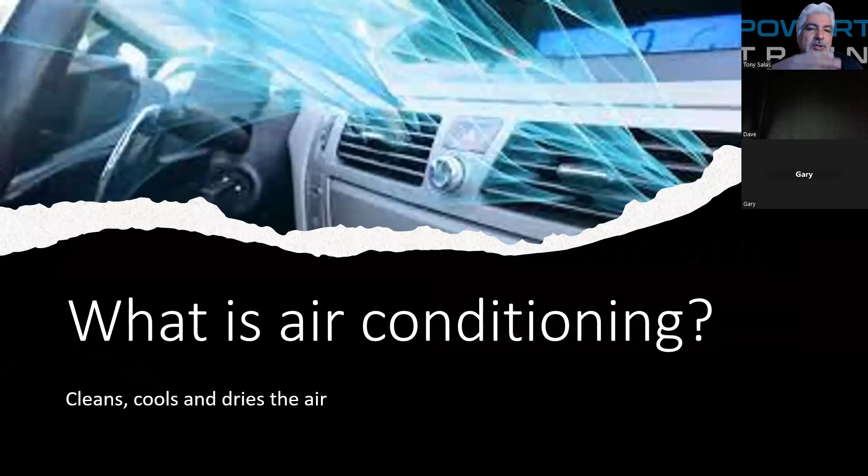We're going to be referring to this as I talk about other things regarding air conditioning. What I mean is, when we talk about the humidity factor, for example this week here in Las Vegas, we're going to hit probably by Saturday 115 to 118, but that is mostly a dry heat. But due to population growth, humidity levels are rising here, so the dry heat is not so dry. Then in August timeframe, we get the monsoon season.

So people will tend to say, hey, my AC, I have to set it cooler or colder, whether being at home, in an office building, or in a vehicle. The AC does tend to work harder when there's more humidity in the air. So your specifications, and I'll show you some examples later about what kind of temperatures you should see, especially in high humidity. So humidity does play a role, and that's why we say it dries the air.

So it does clean. Today's systems nowadays have cabin air filters, so that's a new thing. But in the past, we didn't have a cabin air filter on a lot of trucks. So the cabin air filter adds an insurance policy to protect against any contamination, dirt, or even smells that can come about with the evaporator, which we'll discuss later as well.

So when you talk about people complaining about AC, there's many issues. What are those issues? Well, the AC just doesn't work. That's the common complaint we get when trucks come in - not cooling, somewhat cooling, in other words lukewarm, as people like to say, or maybe it's just not blowing in the face. There's no air coming across into the face.

So your job, as we'll talk about the initial diagnostics of AC, is you want to go ahead and check to see if all the modes are working from defrost to face to floor. Are we seeing that we are getting airflow going in there, and making sure we have adequate airflow as well?

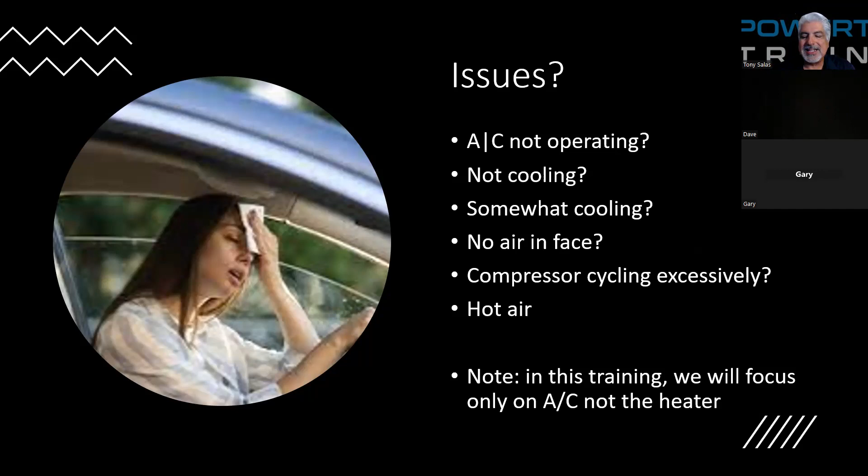So if you've been working with AC systems, let's say you're doing a cab-off repair, or you're just trying to fix the AC system, you've got to know your refrigeration system and how to do the job right. I'm going to start off with one thing as I talk about refrigeration systems and AC systems. And that is this.

If you look at, let's say, I buy a brand new truck - what is the life that I expect out of that AC system before it'll need to be opened up or serviced? Now, if there's mechanical problems with the engine, that's a different story. But what I'm trying to say is, when the vehicle comes new, what is the average life of an AC system? For example, my '06, I've never opened my '06 system on my F350.

So my AC system on my '06 F350 now has what - it's an '06, it's 2023 now, so that's 17 years. So we're talking about that's how long my AC system has worked or is working on my '06 F350, believe it or not.

So I guess what I'm trying to say is the life of an AC system is dependent, especially on pressures and proper maintenance if it's done correctly. So AC systems can live a long time if done correctly.

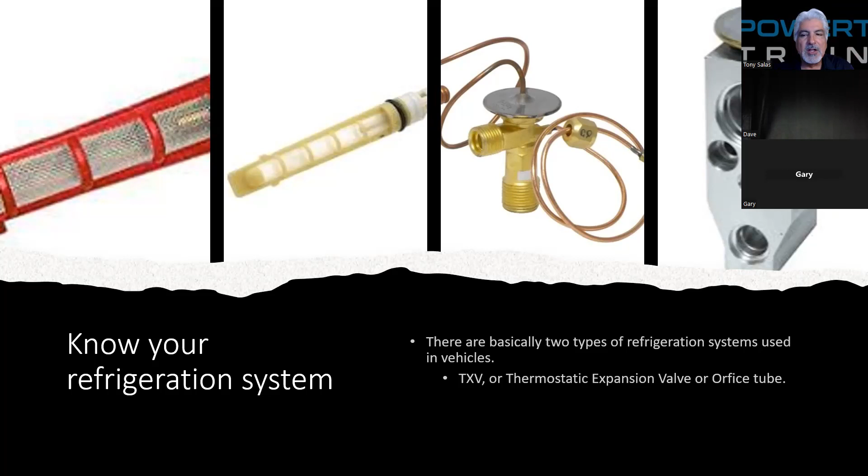So you've got to know it. What are the types of systems? There are two basic types of refrigeration systems. There are variances between them, I understand, but I had to generalize it. In this case, it's thermostatic expansion valve or orifice tube system. Those are the two basic types of refrigeration systems. With ongoing technology, we're going to see a few changes with controls and so on, but it still comes down mostly to thermostatic expansion valve or orifice tube.

Now, I also understand that we have different refrigerants. There's the 1234YF, which we'll discuss later, along with the 134A refrigeration system.

In order to understand how it all works, you've got to know the components. Most of you probably know them, but I'll mention them anyway: the compressor, which many people say is the heart of the system because it's the circulation tool that moves the refrigerant. There's the dryer — receiver dryers on thermostatic expansion valve systems — and the accumulator, used on orifice tube systems. Names may vary by manufacturer, but that's basically what we see. We also have a condenser, and the fan clutch or viscous fan clutch. On my Ford F-350, I have a viscous fan clutch which is PCM or ECM controlled. Then you've got the mechanical fan clutches, like some of the earlier Duramaxes that actually have a literal fan clutch, which we'll discuss here in a sec.

Airflow, right off the bat, is critical for proper AC. When I deal with RVers, for example, putting a motorcycle or bicycle on the front of the vehicle impedes airflow. I can't say enough about airflow, both on the condenser side and on the evaporator side. On the evaporator we have the blower fan as well, and the blower motor needs to be blowing adequate air. One of the tests we'll cover later, when we get into the electrical aspect of AC, is diagnosing the blower motor — we've seen cases in older trucks especially where the blower motor was turning the opposite direction, creating not enough airflow.

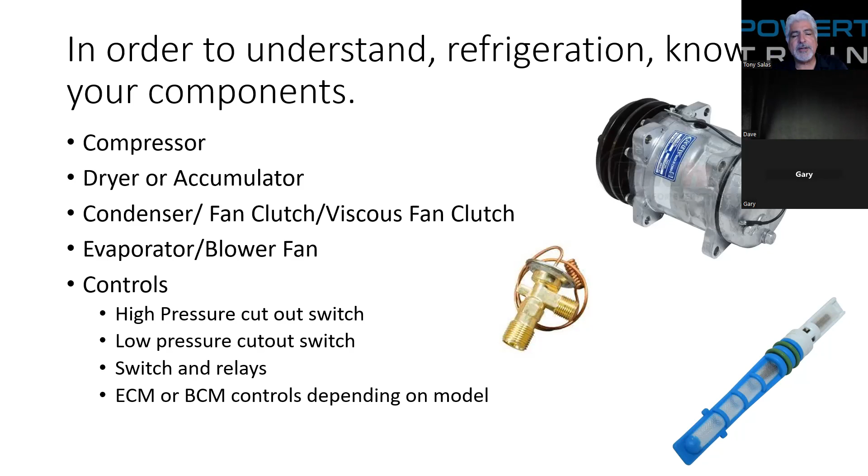So please note that there are controls for these systems. Now, the gauges are pretty much where everybody struggles. I don't know where you guys are at in terms of your level, but we'll ask that later as we move ahead. Your gauges are pretty much the main telltale of what's going on with the refrigeration system — but this is under the understanding that you have good adequate airflow going across the evaporator and good flow going across the condenser. So AC diagnosis relies heavily not only on feel, but also on using your gauges.

There are varied amounts of gauges used, but it comes down to your high pressure side and your low pressure side of what's going on with AC. So therefore, you can interpret a lot and understand a lot by looking at the pressures, but we're going to give you some charts that are available.

And I did a search when I was finishing up this side of the presentation, and I couldn't believe so much information out there that you now can readily have. I went through my boxes recently and found some old AC books, and a lot of it now is online.

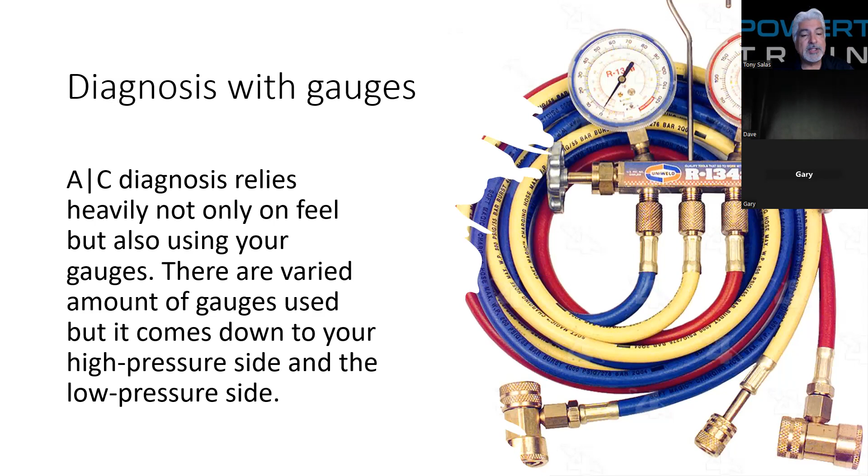Just a matter of doing a Google search, and you'd be surprised what you might find when it comes to pressure. So we need to break down the AC system into the two departments. What are those two departments? Well, there's a refrigeration side that I've been mentioning already, whether it being 134A or 1234YF.

Now, the system develops the cold. This is the cold that you need to cool, clean, and dry the air. So therefore, that's the refrigerating side.

And then we have the HVAC side, which HVAC stands for heating, ventilation, and air conditioning. That is the whole plastic housing that sits underneath the dash or behind the bulkhead of the truck, or whether being on a rear AC system too as well.

So the airflow that is diverted to your face, the seat position, whether being the seated face position, you're going to the floor, or you're going to the defrost mode. It all depends how it's all set up.

Because let's face it, we use air conditioning, believe it or not, in fairly cold environments because we're using the dry air to actually dry that windshield or that moisture that can be condensing onto the windshield or the windows of the truck. So the blower motor develops the airflow to go across the evaporator.

At that point it is diverted to a combination of different modes. Again, floor and face, defrost and face. It could all vary depending on what model truck you have. So your job is to verify all the modes are working.

As you diagnose an AC system, you'd be surprised at all the different AC problems that I get. Number one is, it's just not cold.

Okay, but is there airflow going across the face? Is there some of it leaking up to the defrost, some of it leaking down to the floor? In other words, you need to verify that it's all working.

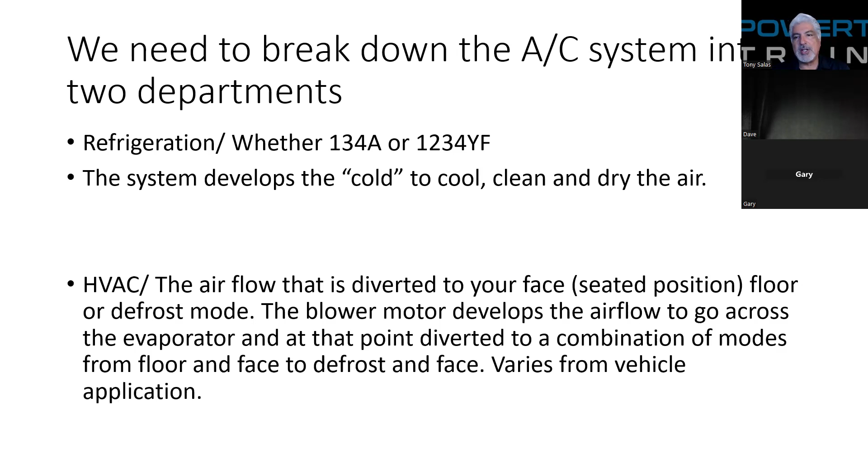Am I getting hot? Am I getting cold? In other words, that mode temperature door - that also needs to be checked because maybe it could be stuck too. So you got to verify that.

So the first step - I mean, we're going to be talking about different technical items, but the first step in diagnosing AC performance is to follow a procedure, what you're going to do. Obviously the easy one, like I said already, is it's not blowing cold. I know. But you need to check the whole operation of the AC system.

So visually, you want to set to face mode. They want you to do a temperature check too as well, but we're not going to get too hard there yet.

But in this case, your job is to turn the AC on. Let's go ahead and put the blower on high. Let's make sure we got adequate airflow. Again, no leaks to the defrost, no leaks to the bottom, but you may want to cycle through the different modes.

Now, let's say the air is lukewarm. Okay, you probably got a refrigeration problem, but you still need to verify that you do have adequate airflow and you're not leaking in other modes. So therefore, am I looking at a refrigeration problem, an HVAC problem, or both?

So the customer might have been living with it leaking to the defrost mode a lot along with the face as well. They were just not aware of it or didn't care. That could have been the issue too as well.

So there are other vehicle models that have more than one fan in the engine compartment. Your job also is to verify adequate airflow. So as you open the hood and check your AC, if it's got electric fans, you need to make sure those are chucking air or moving air.

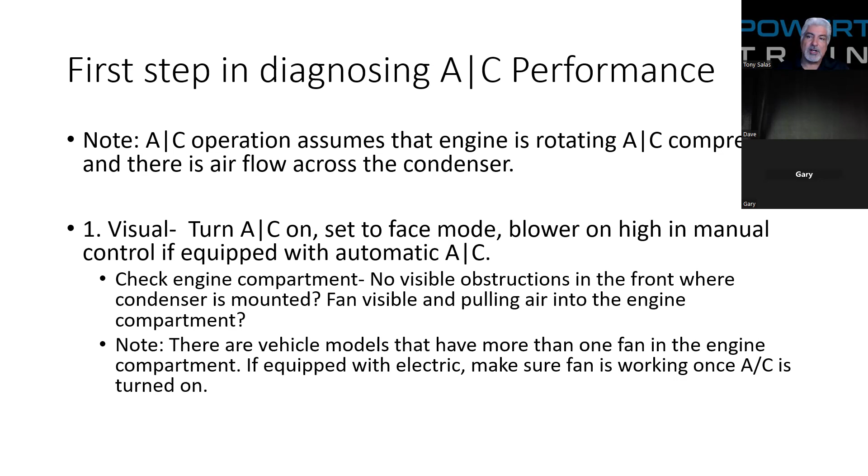Cabin air filters, very important to do. I have a Toyota Tundra, and before I left on vacation last week, I decided to check the cabin air filter. I was amazed at how much, even though I felt I had good airflow, just by removing the old cabin air filter and putting a new one on, the airflow increased even more. We were freezing in that truck, and it's a black truck. Yeah, I know, stupid me buying a black truck, but there you go.

So let's first talk about the fan clutch style. Now, I get a lot of issues. The Ram trucks for the longest time have had problems, the 5.9s, early 6.7s, those diesels. We have had nothing but problems in the past and continue to, actually. I should say we still see them from time to time. We see problems with the fan clutch itself.

So here's my question: how do you test a mechanical fan clutch, as you can see here, or a viscous fan clutch? How do you test it? Many people will go ahead and put something like a blanket or fender covers in front of the grill, and they try to restrict the airflow. That bimetal spring in that clutch assembly will actually control a hydraulic coupler, if you will, and at that point, what it does is release or engage.

So as it gets hot, the bimetal should open, the valve should move, the hydraulics inside it, or the fluid, moves, locks it up, and you should hear the roar, right? That's very common to do.

If you have scan tool control and it's an electronically viscous fan clutch, then you can command the fan clutch, like on any Ford Power Stroke from 6.0, 6.4, and 6.7. But here's the question: with a Power Stroke, you have the ability to watch the fan speed on the scan tool. You go ahead and select fan SS, which is the fan speed. You can control it with the bidirectional controls, see the fan speed change, and audibly hear the fan roar.

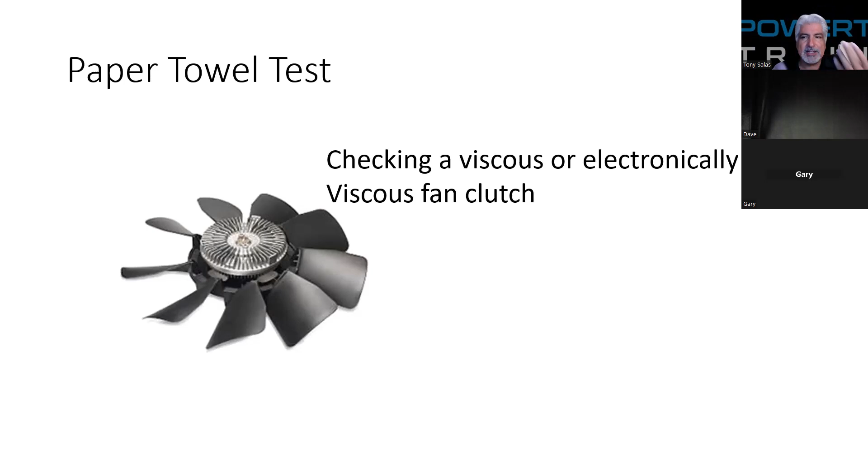I see this in both the aftermarket and even OE parts. You're thinking OE is the better one - that's what I thought too. No, it's not actually. That actually contributes to the life of the compressor, because again, adequate airflow across the condenser reduces the high side pressures, and that helps the compressor live longer. So airflow going across is very critical.

Now, I already talked about the cabin air filter, and about checking the modes of the blower to make sure it's blowing. If you look at an older model, let me talk older first, then later, because they have different setups. For example, the blower motor could have a blower motor resistor, a blower motor module, or a body control module controlling it - actually all 3 exist.

So one of the things you can do, which I'll talk about in session 2 of this AC series, is putting an amp clamp on the power wire going to the blower motor if you have access to it. A lot of them you do have access to, some don't, but you can do that. You're going to measure the amperage draw of that blower motor to see if it's not pulling too much, in other words, looking at its last days.

Or it actually is turning in reverse - that has been known to happen. And by the way, for those who've never seen this, if the blower cage is turning in reverse order, it'll still blow some air, but not adequate airflow. So it's not good. Doing an amp test is going to tell you a whole heck of a lot, not to mention it'll tell you if there's restrictions on the suction side of the blower motor too.

We'll talk more about that later as I get into it. So therefore, verify all the motors.

Now, number 5 says it's common to see vacuum control mode. Some of you know this already, some don't, depending on your experience. We all know there are many trucks out there, especially the early years, using vacuum controlled motors. And if you lose vacuum, the default for most models has been that it shoots air to the defrost mode, in other words, up to the dash.

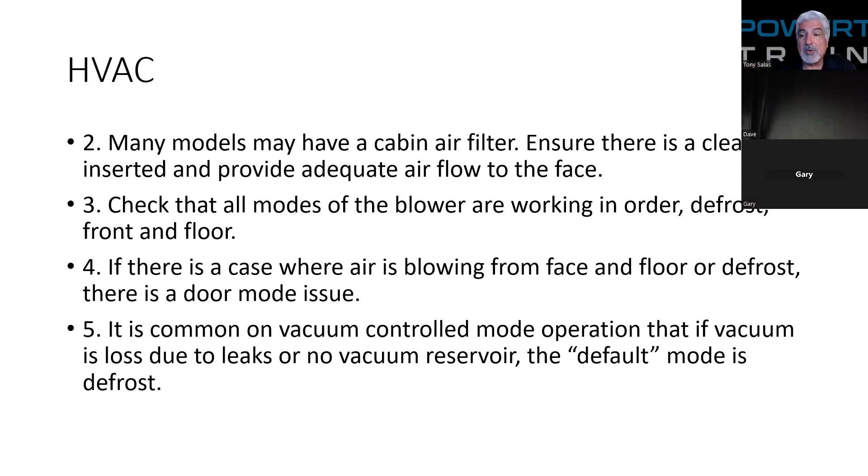In this case, you can actually verify that. There are trucks equipped with vacuum pumps, and gasoline trucks will also use vacuum from the engine itself on gasoline applications. Please note, every time a truck comes in always shooting to defrost mode and it's got vacuum control actuators, it's definitely most likely a cause of loss of vacuum. But we need to make sure we've got no vacuum leaks.

Now, as we look at various different applications, they're all going to vary. When you look at an old Silverado pickup, a Ford pickup, a Ram pickup, you're going to see different modes of operation. So let me go ahead and select the highlighter here.

As we look at the highlighter, we're going to see different things, but we'll see our main components right here. Let me move this over. What do we got right here? Well, we got an evaporator core. So there's our evaporator core.

There's our blower motor. Obviously the outside air comes in, goes across the blower motor, then across the evaporator. So if you really look at airflow right here, you're going to see that the blower motor blows air across the evaporator, and then there's your blend door right there.

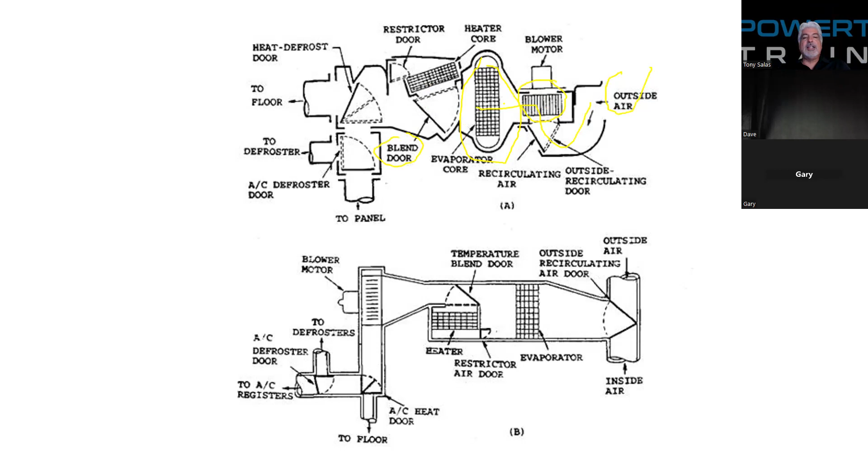So when I look at my blend door right there, that one's going to control my temperature, and you're going to see your heater core as well. So you're going to notice that all airflow coming in on this model actually goes across the evaporator, whether the AC is turned on or not.

That's why we see non-cabin air filter equipped trucks will actually get a lot of trash, a lot of crap in there, because it's just bringing in whatever's outside. If there's a lot of dust and leaves, it isn't surprising that the evaporator actually will get a lot of junk on it, which eventually will need replacement.

There are cleaners you can try to use, but haven't had too much success, only for odor control, because mildew in high humidity areas can actually accumulate around there.

But then, like I said, we got our heater core right there. So there's the heater core where we actually have the coolant being circulated through, and that could heat up that incoming air.

So can you have heater on and air conditioning refrigeration going through the heater core? Yes, because that will dry the air going towards the heater. That's when we see fairly cold, not cold-cold, but semi-cold, where the compressor will still kick on, and at that point that will dry the air, which we can send up to the defrost mode, which we see up here too.

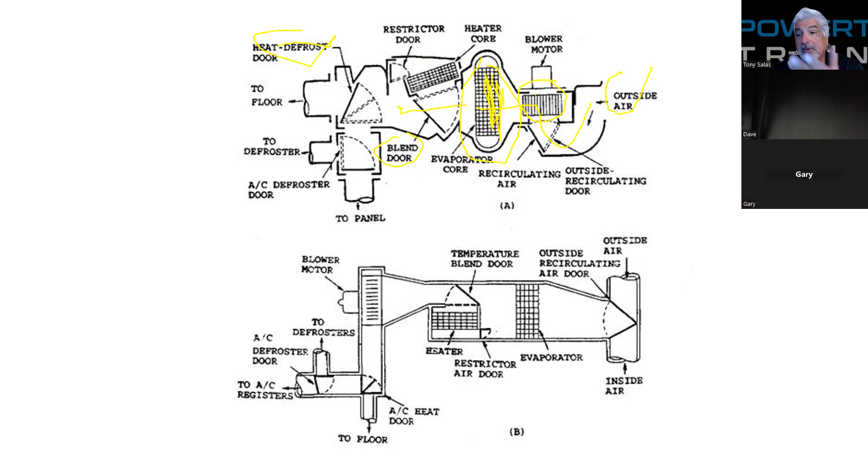So what I'm trying to say is it's a good idea on those trucks not equipped with a cabin air filter to always stick a camera in. Some guys, if accessible, find it easy to remove the blower motor from the bottom of the dash, or maybe from the side of the front, depending how it's all set up. This allows me to put a camera in there.

If I can't see, I can do a camera view of what that inlet of the evaporator might be looking like. I definitely want to verify that, because just because you don't have adequate airflow doesn't mean it's a bad blower motor either. It could also be that the evaporator is just extremely trashed up, very contaminated.

It's kind of sad, because on an '06 truck I did, I told the customer, listen, I took pictures of it with my borescope and showed the customer, it's just so much crap on there. And the truck only had 80,000 miles. Literally we had to charge all the labor to pull the whole dash out just to get to that evaporator. That was not fun. He didn't like it, but hey, that's what he needed to get his air conditioning back up.

So definitely those of you that live in high humidity conditions, like I said, mildew and growth can grow there. And there's different cleaners they sell you can spray in there.

You might have to drill a hole that you can eventually silicone into the housing. What you're going to do is clean that up, and pretty much you're trying to get rid of odor and any bacterial growth that can make people sick. Some people might say, when I turn my AC on I start sneezing or get sick - it could be that the evaporator is just really contaminated and has growth in there. So be aware of that.

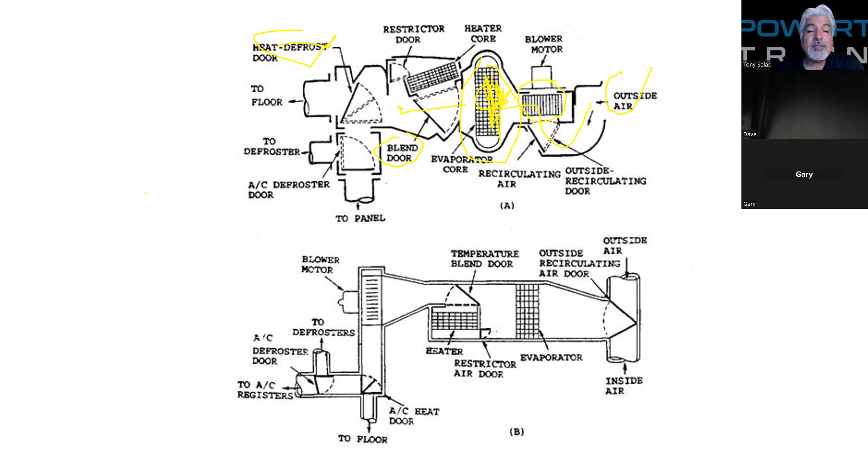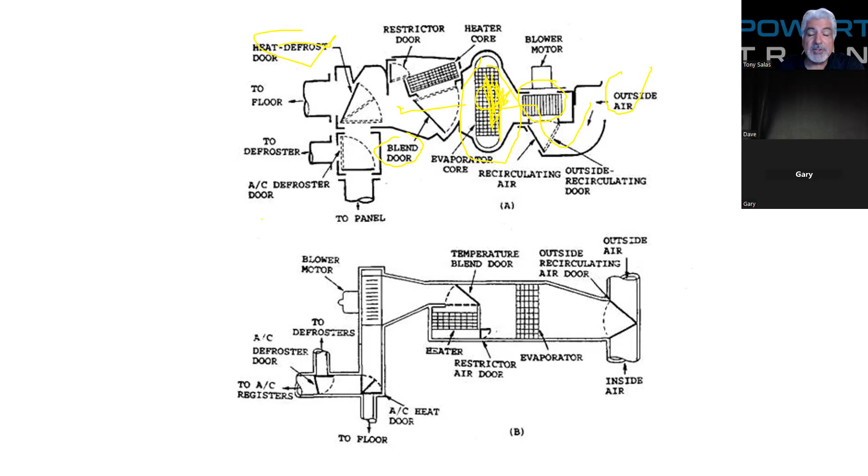On this bottom assembly, you can see the blower motor right here. So there's your blower motor, and there's your temperature blend door. There's your heater, and then there's your evaporator, and that's your outside recirculating air door. How's this all working? The blower motor is located here, with outside air and inside air on the bottom. It can vary in design as you can see here, so it all depends on design. Just understand the location of the blower motor and the location of different components.

Now, I don't know if you guys take time to look in the service manual - there's a lot of explanation on how the airflow works on different service applications, which I'll discuss in part 3, going over service information too, what's available for you.

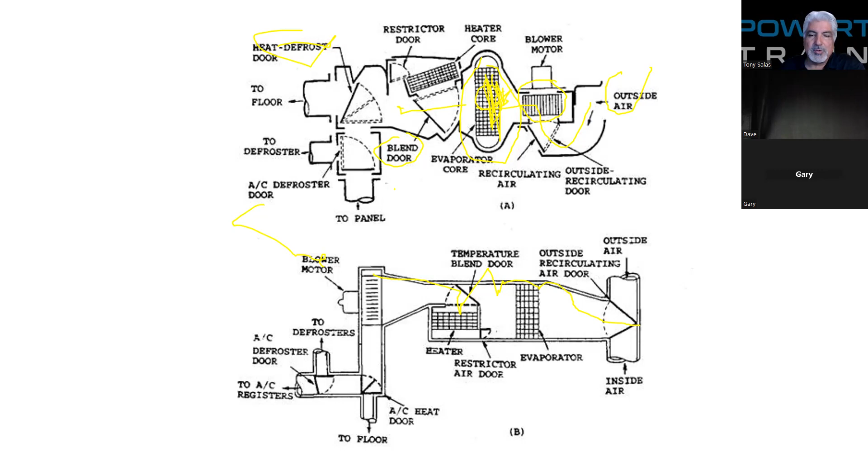So now, when you're checking your AC, it's important to make sure the truck has a heater control valve - for example, on 6 liters. Here's a good example, the one everybody can see there on the passenger side, sitting on top. It is a vacuum controlled heater control valve. I took a picture of one - in this case, yeah, it is vacuum controlled.

In this case we can see the diaphragm right there, that's going to move and put it over here - that's the vacuum control diaphragm. The vacuum control is going to move this lever and control the flow of coolant going toward the heater core. Why do we cut off the coolant going to the heater core? Because we don't want that intensity of heat sitting in that HVAC housing, so we just shut off coolant flow to it, so the HVAC housing can stay cooler with the evaporator and the refrigerant going through it.

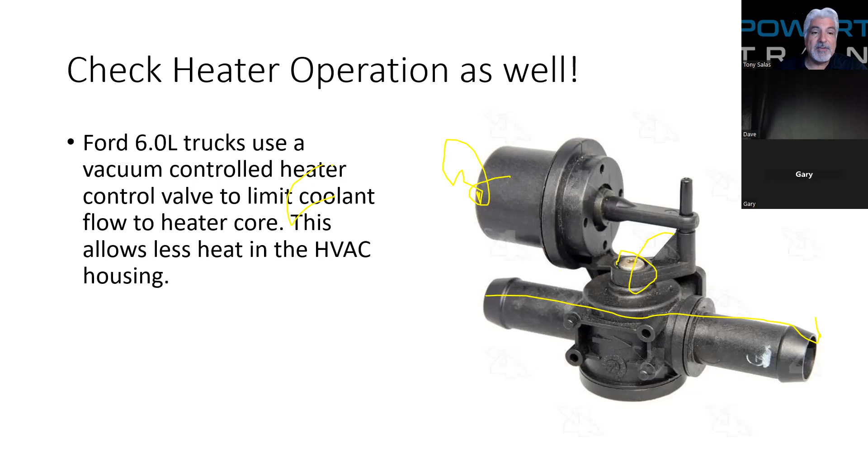That's something we need to verify too. Now, many trucks, you won't see much of a difference in refrigeration control - in other words, the coldness of it - but it affects it to a certain degree. So you want to make sure that you verify that it's in the closed position, and also verify its operation. You could put a vacuum pump on it to make sure it's not binding, and obviously they can leak coolant too, but just verify that it is closed during AC operation. That's something you always want to look at. I got to tell you, with 6 liters, I can't tell you how many of the hoses are just falling off, sitting there falling off, and it's never been working right. So you want to verify that the heater control valve is indeed closed - that's what you're looking for.

But when you look at refrigerant itself, pressure is pretty much, I'd like to say, everything. So the first thing in order of business is the challenge: is the system contaminated? When I go to my local auto parts store, or look on Amazon, you see all the stuff being sold - people have been topping off their refrigeration systems till finally it doesn't work, every year having to put a pound in it or this and that. The problem is some of those refrigerant cans they buy can have oil in it, or some other stuff or dye in it. So dye, oils, or other refrigerants have been used, which can contaminate the system.

Now, when I visit our outfit here in Las Vegas called Auto Air and More, they repair a lot of AC machines - recovery stations and such. I asked them a while back, a few years ago, what do you guys find that you're fixing on AC machines or station recovery stations that you do?

A lot of it is contamination. They get a lot of contaminated machines, meaning excessive dye, excessive other refrigerants, other stuff that's in it. So that's a big problem when we're dealing with some trucks, especially since I'm in Las Vegas. We get a lot of out of state trucks - what do they put in it?

So it's a good idea to get an identifier. A lot of guys don't use it. My identifier, I got to get a new one, it's no longer working. I tried to use it the other day and it doesn't work too well. So that's another thing.

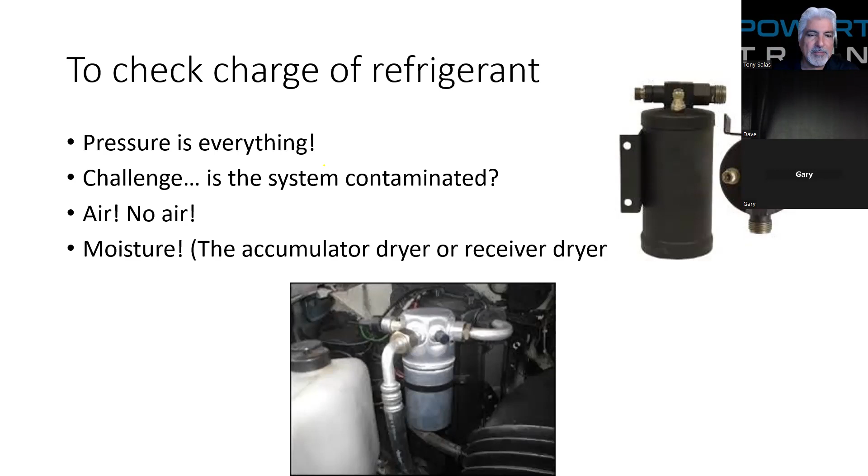So you're not sure, you don't know what's going on, but again you need to make sure you have the refrigerant you're supposed to have. Now the price of 134A - I called yesterday the local auto parts here, and the latest price I got was $279 for a 30-pound container.

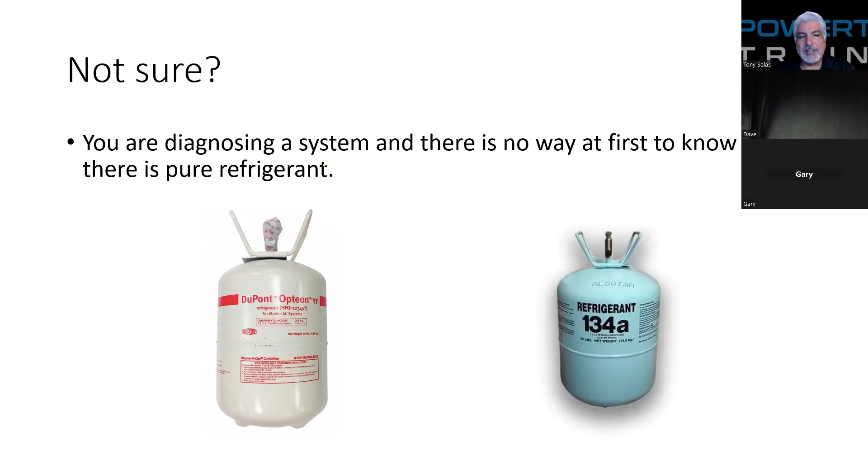And 1234YF, oh my God, that is mega money for that kind of container. I believe it's $900, I forgot - I gotta look, I didn't ask him about that one, but when I called a while back it's very expensive. So 1234YF is significantly more expensive than 134A. So I understand that, but again, you have to have some kind of identifier.

And why do you do it also? It's to protect the refrigerant that's already in your recovery machine. You don't want to contaminate your recovery machine. Because imagine if you have the wrong refrigerant in there mixed with 134A - are you going to get optimum temperatures once you charge the system up? Nope. So you definitely want to look at getting an identifier.

I myself, like I said, I got to get a new identifier too. So something to keep in mind, because you definitely want to make sure you have the 134, or 1234YF, and no other contaminant - the charged refrigerant, the status of the AC system you're working on.

So the thing is, you're approaching this vehicle. You just did an initial diagnostic, like we said in the previous slide. You verified the airflows - face, defrost, floor. You check to see there's good airflow across the evaporator. You tested the blower motor.

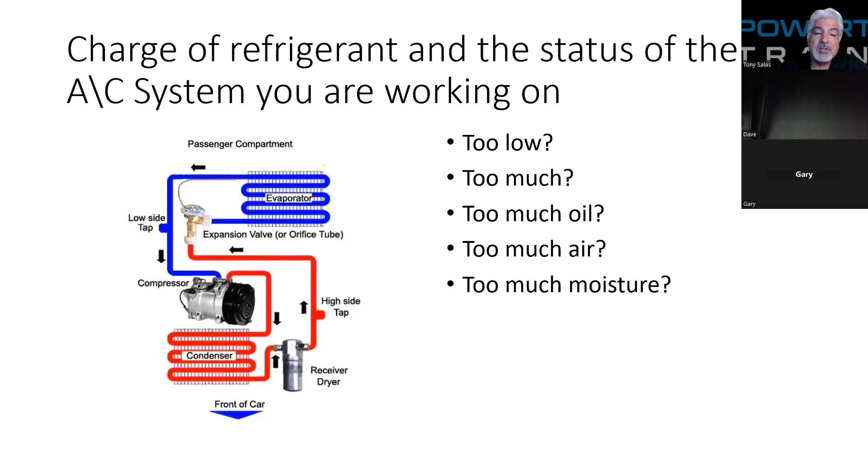So I don't know if the system's charged. So when I do an AC service or diagnosis, I charge for the recovery and the charging because I need to know where we're at. There's no way of me knowing what's going on the outside, so it could be overcharged or undercharged. So your AC recovery machine is going to be your best friend, but we'll talk later on more about the recovery machine.

But in this case, I hope you have maintained it. You change that oil, especially on that vacuum pump. You've changed your filters inside of it. That's all needed for proper operation of the machine. So there is maintenance that needs to be done with the machine.

But in this case, we need to recover. When you're looking at a system and you need to know what's going on, maybe it's the pressure all over the place. We got to understand that we don't know, again, that there is too much oil, too much air, or too much refrigerant, or too low, right? So therefore, the best idea is to actually recover.

Now, a lot of your recovery machines have the ability to extract the oil. They separate the oil. So in this case, we have PAG oils out there. We got minerals, we got ester oils, and so on. So in this case, what I'm trying to say is we got to make sure we have an understanding of how much oil there is.

So therefore, that's telling me that most likely I got a lot of oil in the system. So since I recovered, my next course of action, if it's an orifice tube system, for example, I will take the accumulator off and drain it to see if it's got excess oil too as well. So if I pull 4 ounces from the recovery and another 3 ounces from the accumulator, that system is vastly overcharged.

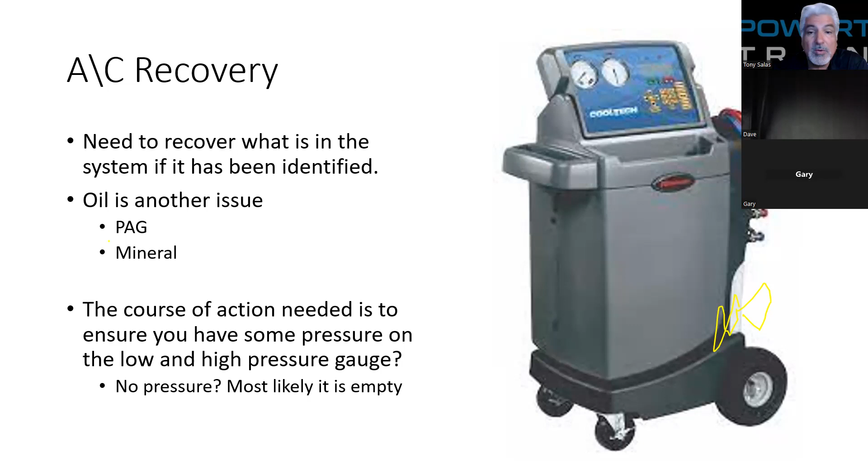But guess what? I'm going to do a recovery even if it takes a few minutes. We're going to see what comes out of there, if anything. But it might be low. So if you see 10 psi on both the high side and low side, yeah, you're running low. So therefore, you still recover, you still want to see, and then at that point you can decide what's going on, whether being you got too much oil, too little oil.

But I'll try to make sense of it as we move along. So like I'm saying, take a quick look at your gauge readings, the low and high pressure side.

Yes, there is a low and high pressure side in an AC system. I haven't introduced that, but there is a low side, which we tend to show in blue, and a high pressure side, which we tend to use red color to show. So let's mention the peaks. For the peaks on an operating system, if it's kicking on, if it's working, I generally don't want to see no more than 50 psi, and again, no less than 15 psi. And then on the high pressure side, you got to make sure the compressor is engaged, obviously.

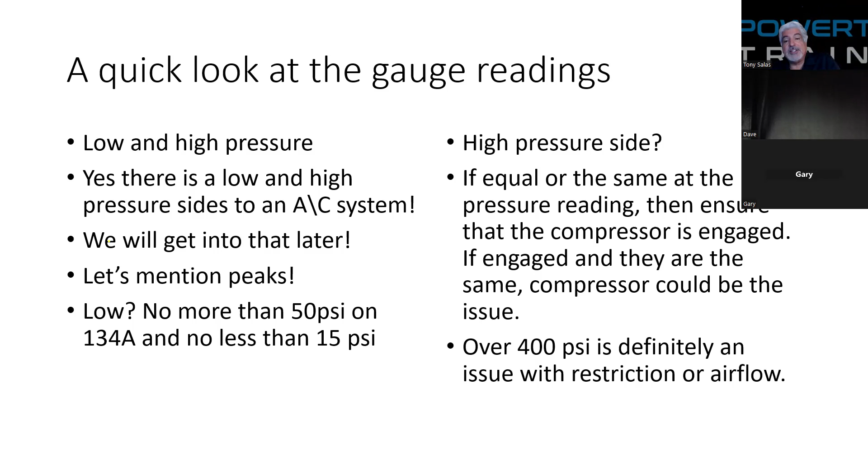And in this case, the magic number that should scare you is 400 psi. If immediately I turn the AC on and I see that high side gauge jump to 400, if not more, then that's a red flag right off the bat. Whoa, we got too much pressure.

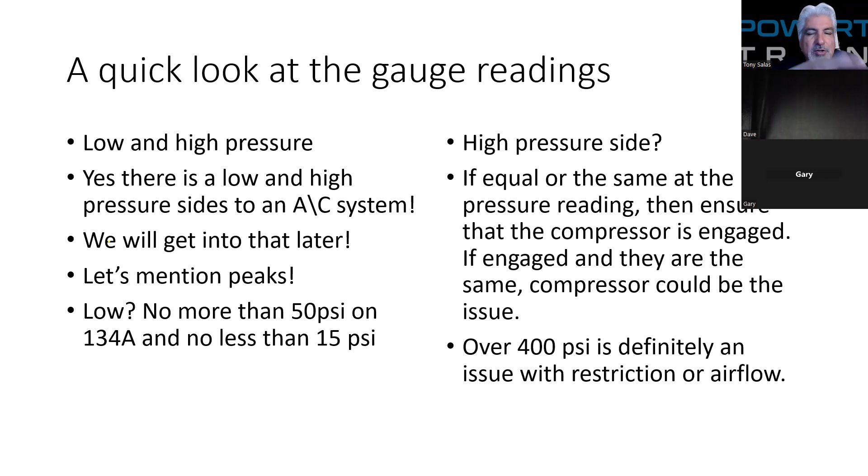As we introduce AC, obviously we got to go in more details. I'm just throwing you some basics here. If you hit 400, that is a big red flag right off the bat. That is a scary situation for the AC system. So high side no more than 400, while the low side you don't want to go over 50, and no less than 15 psi. Under 15, depending on the calibration of the low pressure switches, it could cut out the compressor at around 20 or cut it out at 15, depending on the make and model we're talking about. So I know you're looking at those readings and you want to try to make sense of it. Hold on, we'll continue talking about it as we move on ahead.

So the AC recovery process, this is under the assumption the machine is working good. You're gonna go ahead and pull the refrigerant, anything that's in the system, it's gonna pull it out. That's why we use the identifier, we pull everything out, and it'll actually separate the oil to tell you roughly what the oil content was in that recovered refrigerant. So again, we're gonna look at some numbers, and 2 ounces is probably the max, but we'll talk more in detail about it. We should not see that much oil coming out with the refrigerant.

But here's the other thing. If you pull refrigerant out of the recovery machine and you pull out so many ounces, you should put some of that oil back in if it's a normal system. So as much as we take out, we also need to put back in if necessary. A lot of guys recover when they're doing repairs and they're taking out oil, because the oil itself, like for example, let me backtrack to R12. I know this isn't an R12 class, but with R12, the old dichlorodifluoromethane stuff, the mineral oil went into solution. So as the refrigerant was circulating through the system, it was carrying the mineral oil with it.

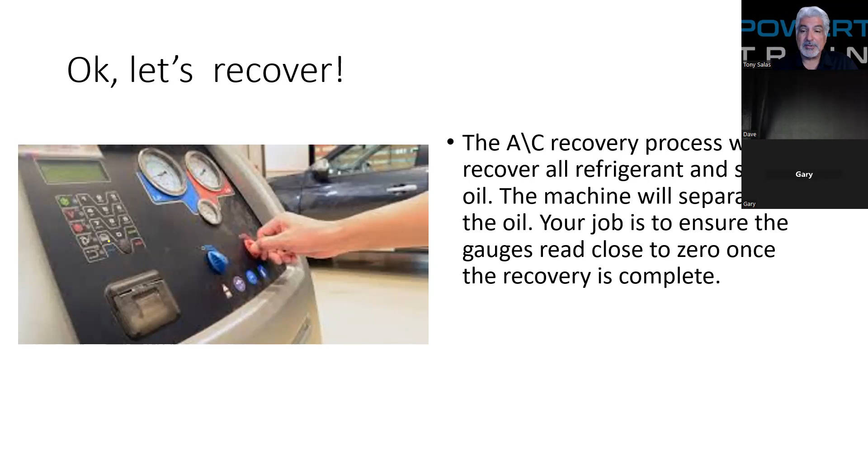However, with 134A, with PAG oil, it is snotty, it's just sitting down there. Back in the old days, in our community college days, we used to have a plastic see-through accumulator, and you could see the refrigerant and the PAG oil actually circulating, and this PAG oil was just snotty. So it's kind of like snot moving throughout the whole lines, through the whole system. That's the unfortunate part of PAG oil, same with ester oil too as well. So oil is constantly in motion, moving with refrigerant. If you want oil to move, you got to have the refrigerant moving with it, so that's what's moving the oil. That's why when you pull refrigerant out, it isn't surprising that it has oil with it, and that's what the machine is separating. So that is part of the recovery process.

So you might have a lot of dye in the system, or you're going to see that it has oil in it. So as they add a can, they're adding oil, oil, oil, over oiling the system, which in turn will affect the performance of the AC. It will not work properly.

Please make note that most systems vary in oil, but 7 to 9 ounces on a single non-rear AC system is about the average we see. So that's what you got to keep in mind. We're at the mercy of what they've done in the past with that AC system, whether they added too much oil or too much dye.

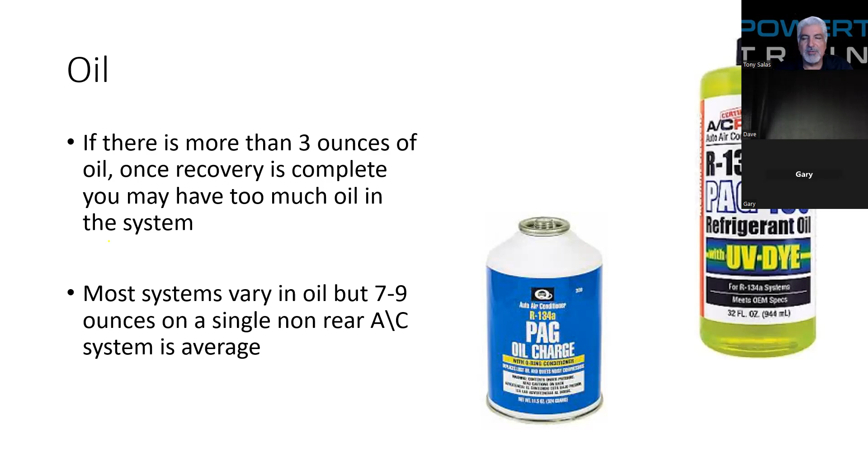There's some systems I've opened up where the condenser and everything is coming out dye, dye, dye. I mean, they over-dyed the system like you wouldn't believe. So a lot of dye in it too.

There are specifications, and like I told you, 7 to 9 ounces, somewhere around there, is the normal capacity of oil. So if you pull 3, 4, or 5 ounces out of it already, that's telling you, wow, that was in the refrigerant alone. Some of it should stay in the evaporator, the accumulator, the receiver dryer, or the condenser itself. So if you're pulling out a lot of ounces already, chances are that system is over oiled, like I keep mentioning. It's a wise idea to look up the specifications.

But from experience, I've learned on single AC systems, non-rear AC systems, they use no more than 8 to 9 ounces. And that's kind of a telltale sign of what you're supposed to do.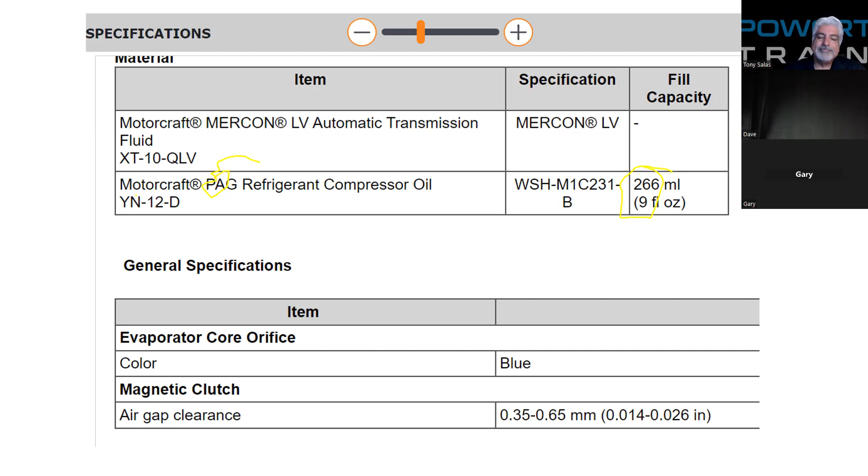That tells you this system is most likely over oiled. So we need to get some of that oil out and try to alleviate some of it, because most systems, like we'll talk about later on in the final service, will have 2 ounces in the condenser and about 2 ounces sitting in the evaporator. So do the math from that point. I guess those are the specifications.

So as you continue your diagnosis, you're now going to perform a vacuum. You recovered, right? You're doing a diagnosis, you do recover. The next thing a lot of guys will do now is put it in a vacuum. But in this case, why is there a vacuum? What is a vacuum?

First, let's get one thing clear about pressures. I even did a YouTube video on my Diesel Talk YouTube page talking about gauge pressure versus absolute pressure. We're not going to get into that, but I do want you to understand how critical vacuum is. I know vacuum is supposed to put the whole system into a negative pressure, but why? What are we trying to do? So the question is, what is vacuum?

Why vacuum? For starters, vacuum is a low pressure. So when you look at a gauge like this one, you'll see there are two different scales we generally use to measure pressure nowadays: kilopascals and inches of mercury. This is a dual purpose gauge, you can see 20 kilopascals there, 80 kilopascals there, and they're saying a perfect vacuum is 30 inches.

Technically, reaching 30 inches is next to impossible. We might get 28, 29. If you get 30, it's the total absence of high pressure. But let's say you're getting a good vacuum, close to 25 to 29 inches, that's the equivalent of close to 100 kilopascals. So you're seeing 0, 20, 40, 60, 80, and minus 100 kilopascals. Pascals is a scale of measurement to measure both negative pressure and high pressure.

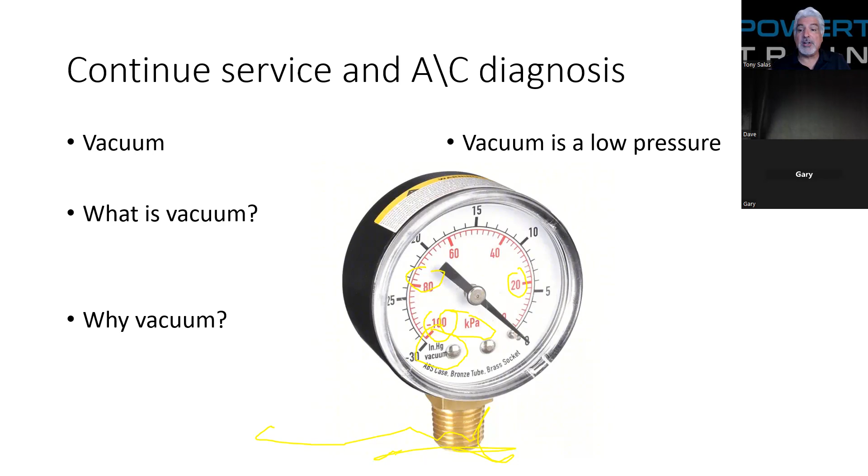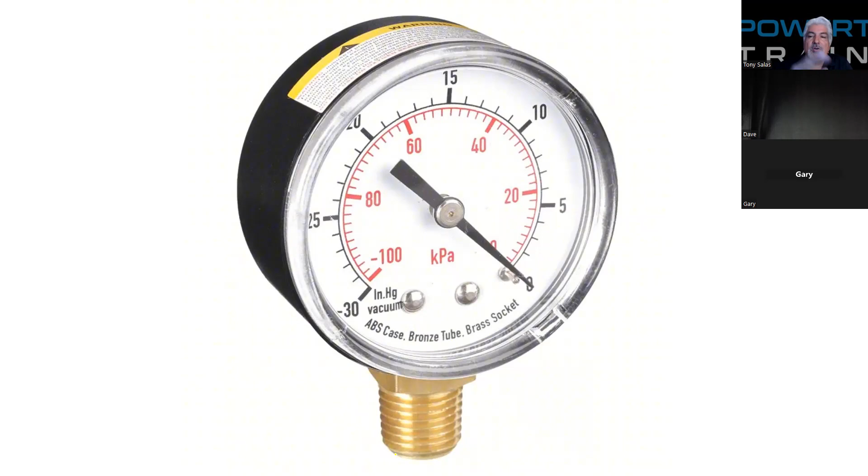But then again, if I ask Siri on my cell phone what the atmospheric pressure is today, it's going to vary because you might have a low pressure weather system coming in or a high pressure system. What I'm trying to get at is when you look at a vacuum, you're looking at a negative pressure under atmospheric. As I look at this gauge closely, I see 5 inches, 10 inches, 15 inches, 20, 30 inches. I'm going to watch the vacuum pump make a suction into that AC system, creating a very low pressure under atmospheric wherever you're at.

So when I look at an AC gauge, you've got a lot going on, okay? Depending on the AC, and on the next webinar we'll take a look at my gauges, the 2-in-1, and our machine too. But for starters, have you looked? I challenge you to look. If you've got separate gauges or one on your machine, it could vary. Some are just plain numbers of PSI or inches of mercury.

Some are like this one right here. This one gives me Celsius, but you'll notice it works with various different refrigerants: 134A, R22, R404A. So when we look at the low pressure gauge, how do I know this is a low pressure gauge? Because it's blue in color, as you can see on the outside. Not to mention, I see the blue here.

Now I'm going to throw this at you, and then we'll go over it more in depth. When I look at a low pressure gauge, I'm also looking at the temperature of the evaporator on the low pressure side. So therefore, I can know what the temperature is. Let's say you're reading roughly 30 psi right there. So what is the temperature? You're trying to get an accurate read of where the temperature is at. We're going to analyze that even more closely, but in this case, you can interpret it.

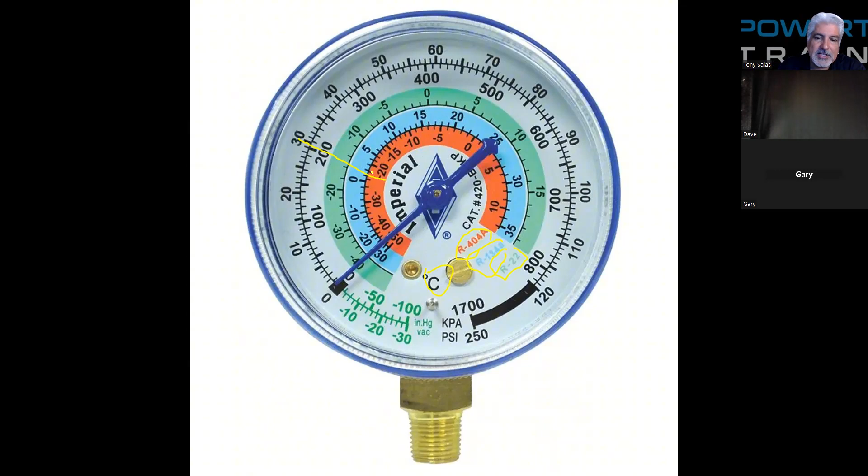So here we can see, I tried to get a clear one, but this one will do. This one's not in Celsius, but in Fahrenheit. So once again, if I go to 30, you could see here, I'm going to try to go directly across. If the needle's going across, roughly how many degrees, as you can see right here, we're around 35, 34 degrees, somewhere around there. So that's what the gauge can interpret for you.

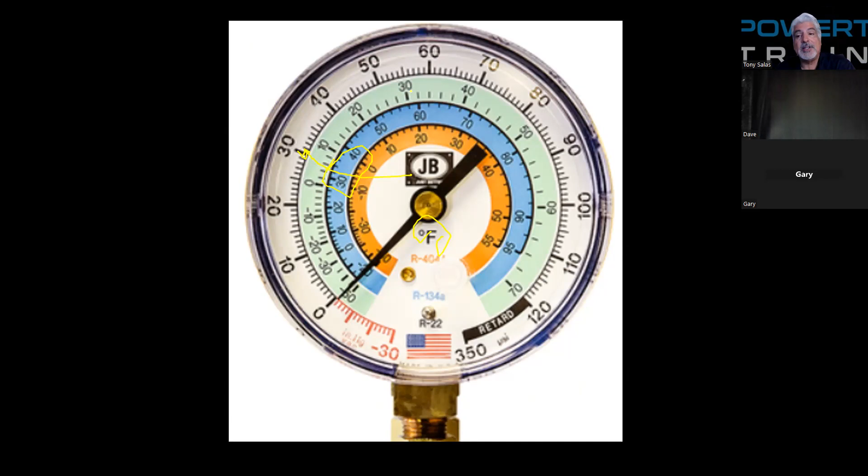So saying this again, the low pressure gauge is telling you what the temperature of that evaporator is, what's going on with that evaporator, based on the fact that the high side's working correctly too. I should mention that.

Now you could see the similarities of this gauge, the scale for 134A, and obviously there's one for 22, but we're not using that. You also can see that we're at 0 pressure, and then you can see your vacuum right here all the way to 30 inches. You guys have seen this on many common gauges out there. So again, this is a PSI gauge, so we do read PSI, but we can also read in inches of mercury.

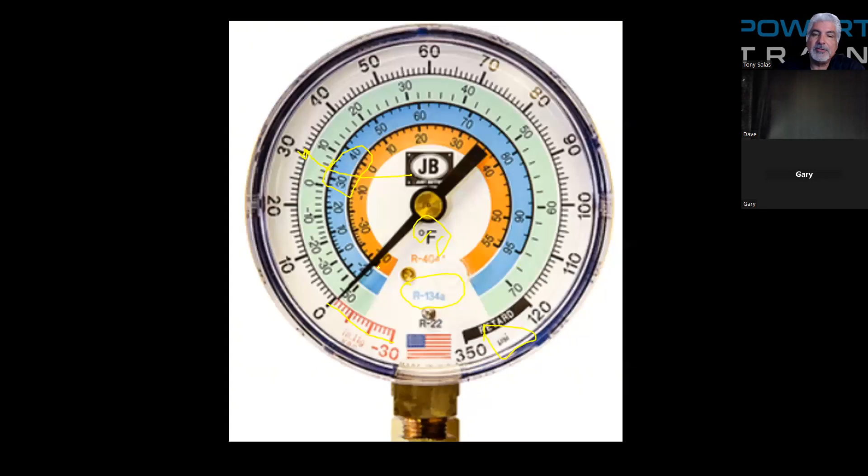There's your PSI, not very clear. And do we read kilopascals too? No, this one does not read kilopascals, as you can see here. Different gauges, so you can see the difference between one and the other as you look at the gauges themselves. But let's stick with vacuum for now. We saw that vacuum is measured in inches of mercury or kilopascals, and I mentioned already that sea level pressure is 14.7 psi. Again, it can vary depending where you're at. The higher the altitude, the lower the pressure.

Okay, if you haven't understood that, I highly recommend doing a Google search on it, because when I was searching stuff, I found a lot of cool stuff about pressures, especially regarding a vacuum.

So please note, if I'm at sea level, at 14.7 psi on a good day, anything under 14.7 is considered a vacuum. So we're creating a low pressure. If I asked, what's a low pressure? The answer should be anything under atmospheric pressure. But it gets confusing because PSI is used for atmospheric pressure and higher, while inches of mercury is used for low pressures.

And that's where it gets confusing, two different scales for measuring pressures. That's why the kilopascal is ideal, because it measures both high and low pressures. So instead of using PSI and inches of mercury, which gets confusing, kilopascal handles both.

So if I asked once again, what is a low pressure? Where do we start measuring inches of mercury? Is it anything under atmospheric? If you're in Denver, Colorado, used as an example because they sit a mile high, 5,280 feet of elevation, it's 12 psi atmospheric pressure on a good day, with no high pressure system moving through. So anything under 12 psi for them is a vacuum.

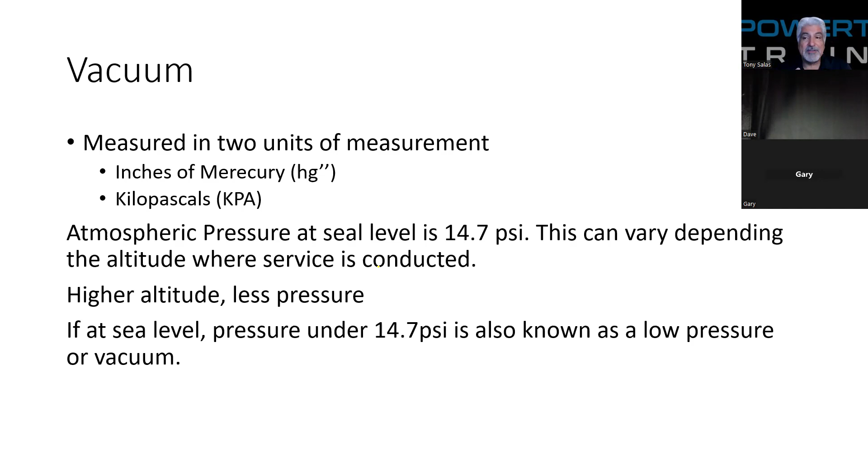But what are you doing to the air? You're actually changing the boiling point of water. So we're not sucking the moisture out, we are boiling the water out. Some of you may know this already, some may not, but you've got to understand what's going on in there. We actually need to make sure we're boiling the water out.

So just because the gauge moves down close to 29, 30 inches, and you're pulling a vacuum, that still doesn't guarantee you have enough suction or volume to bring that boiling point down.

So how many of you knew, let's see if you can type it in the chat, that you actually boil the water out? Let's see how many know. Hit the chat and let me know, did you know that you're boiling the water out? Type it in the chat. I don't ask too many questions, I don't want to put you on the spot, but we're just asking. Anybody? Oh come on, don't be shy. Yes, no? Now the reason I'm asking is I'm waiting for some of you to reply, since some of you are not quick to reply.

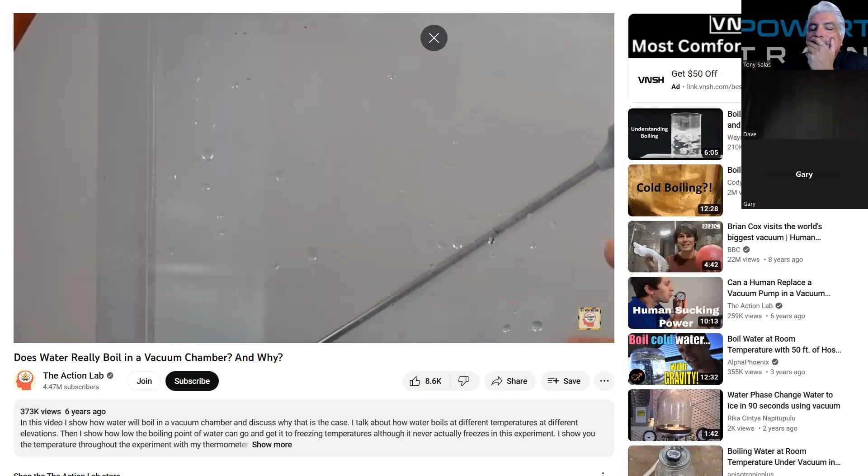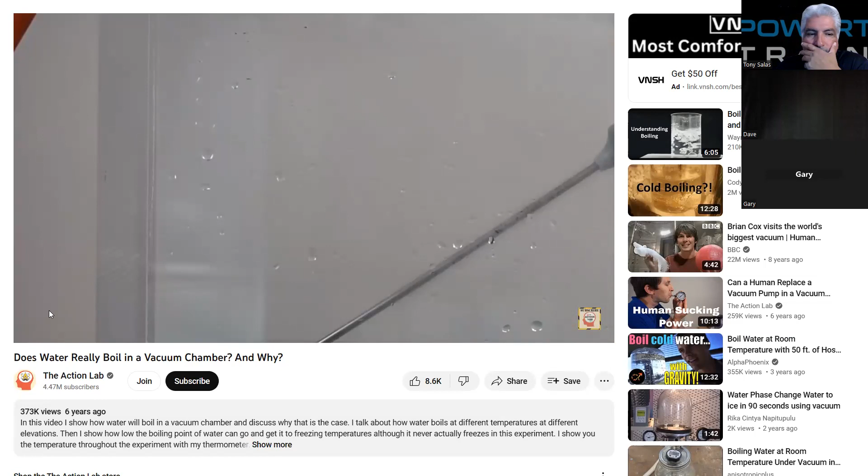All right, for some odd reason I am having bad luck here. The screen is actually not going to full throw, so let me stop the share here. My apologies, I did run a test on it before I even started. So let me go back to my presentation here. What we're trying to illustrate there, if not, I'll send you the link. See, there it is working. Hold on, let me try this again. Just a second, let me copy this. I can fix this, give me a second here. Let me go back, and let me go over here. So in essence, what he's trying to show you, I'll fast forward when I open it up in this window, so this will be much better. Give me a second, I know how to fix this if my computer hurries up. All right, so let me go full screen on this.

It is important to understand what is going on. That's why I'm reiterating this. Come on, full size - everything is moving slowly as I'm moving different applications here.

Really, why does it do that? Let me close this out again. Why is it doing this when I'm doing this? Close it. If you have any questions while I'm doing this, please ask.

But again, what we're reiterating, I can't say enough about this, and that's why it's important that we make sure the vacuum pump is pulling moisture. Because once again, when I see premature failure of AC systems, let's say they're going through a compressor every year, two years, a lot of it has to do with how contaminated the system is.

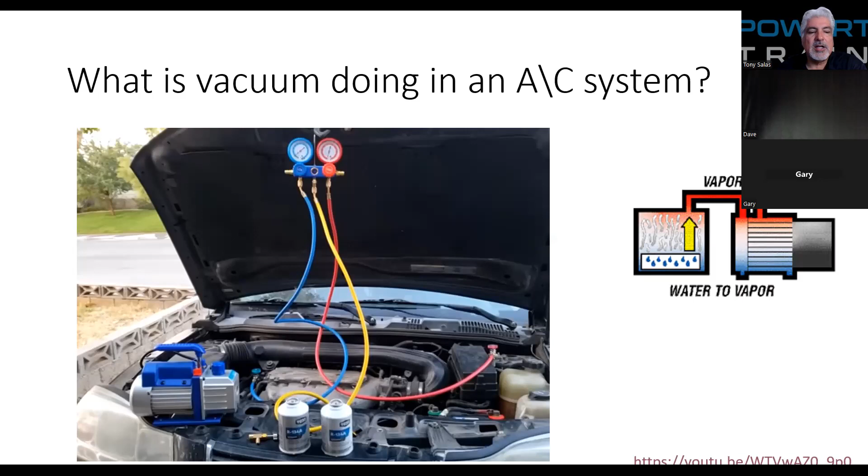So, okay, full size. Okay, now I got it. Now let me change the share, and I'm going to fast forward to get to that point. Okay, now we're showing it. Okay, here he is.

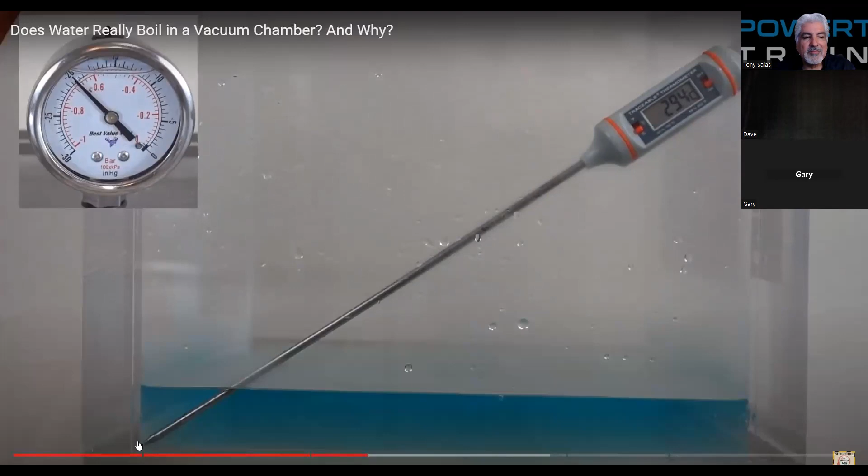Okay, since you can't hear the sound, what you're going to see here, he's putting it into a vacuum, right? So the vacuum continues to increase. You'll notice the temperature remains constant right here. He's watching in Celsius, 29 degrees Celsius here. So in this case, we see 29 degrees Celsius there.

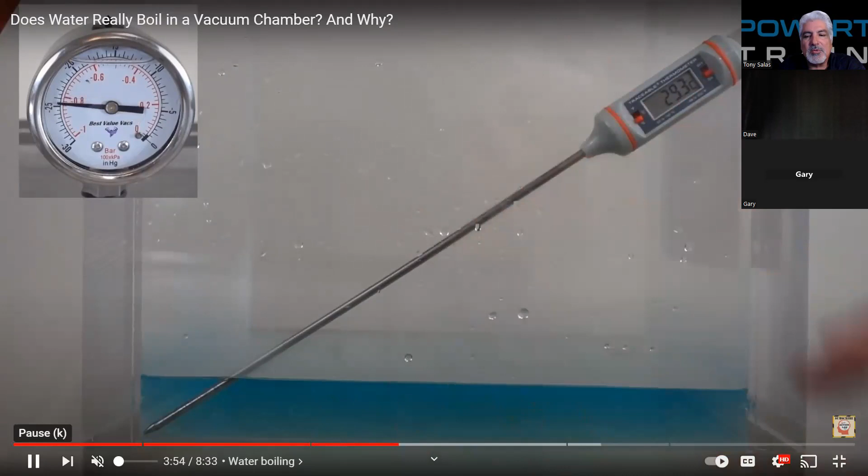Again, he's pulling a vacuum. There's the water. The temperature is not changing, okay? So as he continues, let me mute it since you guys can't hear the sound. In this case, as you continue to actually raise the vacuum, hopefully you can see the vacuum gauge going up on the top left of the screen. You're going to see the bubbles of the air that's already inside of the water start to actually be removed there.

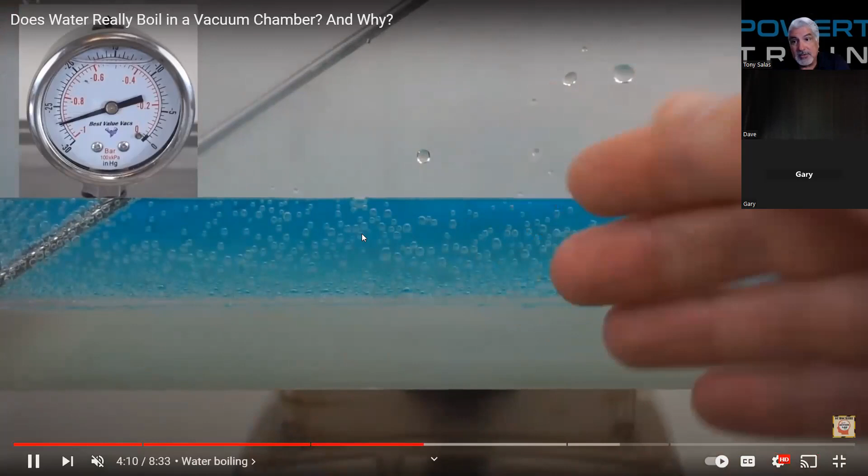I forget the word they use. So in this case, again, you'll notice there's the bubbles. That is not boiling yet. That is just the air that's actually coming out of the water because as you know, like fish, they breathe the air in the water. So therefore, that's what's actually being dissipated. It's not boiling yet.

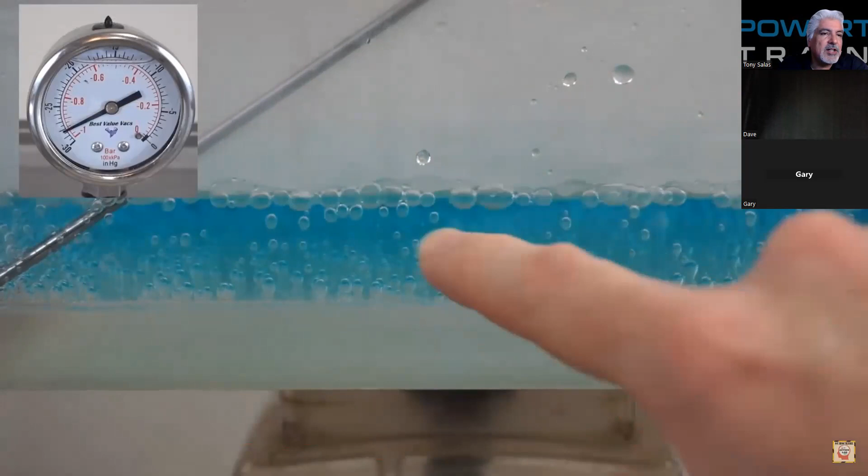So at this point, as you continue to build a vacuum, what is happening there? Well, what's happening is that eventually we're going to start to see the boil. Again, the oxygen is the first that's actually being removed from the water. That's oxygen, you see the bubbles coming up. And then finally, you're going to see the boiling taking effect.

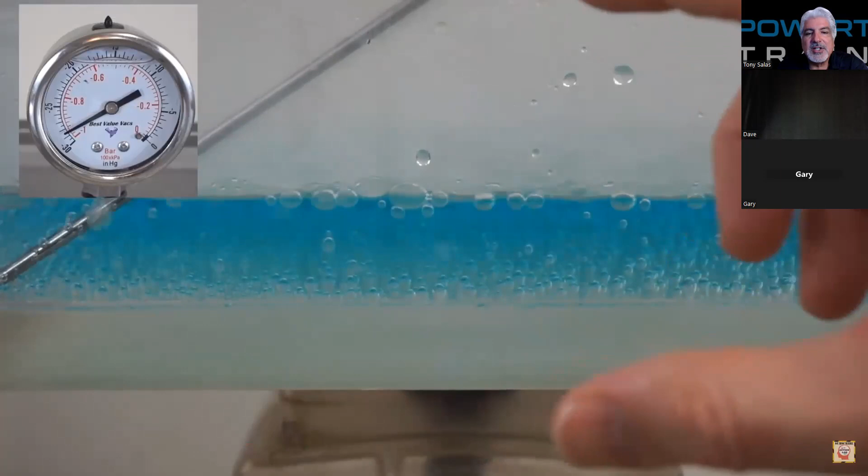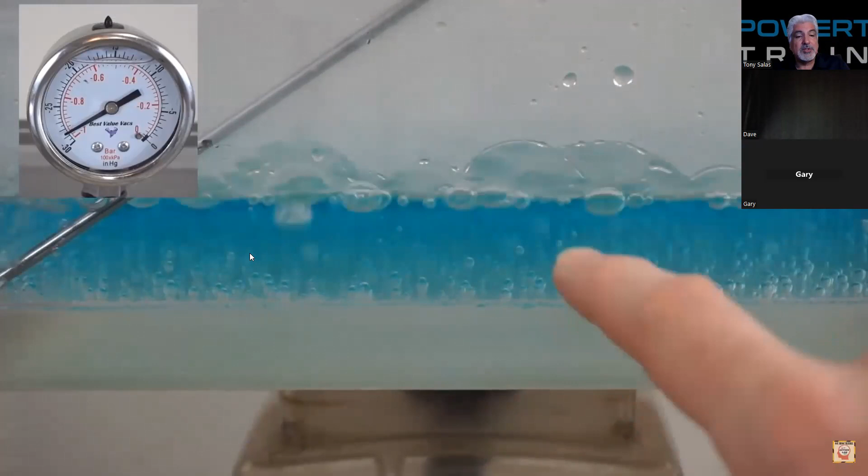Okay, again, you see the vacuum. We're at about 28 inches there, roughly 29 close. So in this case, you're going to see finally the boiling taking place. So therefore it continues on, and then we finally see the boiling taking place there. That's what you see going on into the jar. So therefore, hopefully that gives you a visual understanding of what's taking place with vacuum.

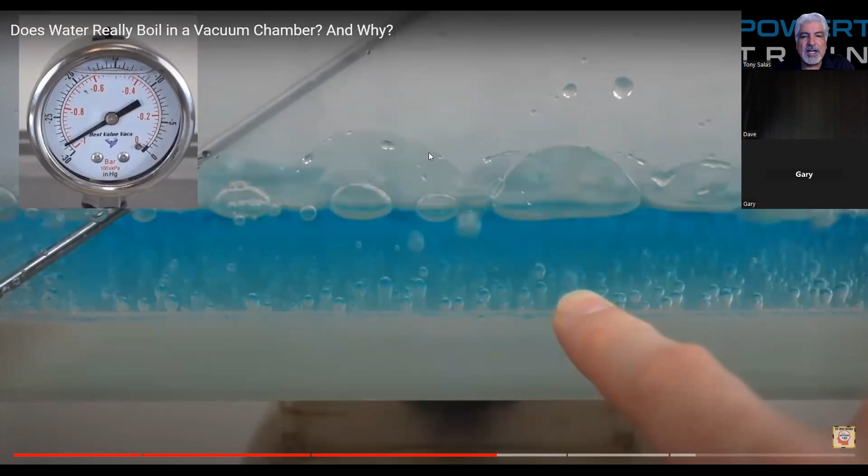But like I said already, the problem is we see many guys thinking their vacuum pump is doing the job, but it's not. So again, my challenge to you is to go ahead and get a mason jar. Like I said, buy a low pressure fitting, drill a hole in the lid, JB weld that low pressure fitting and test, fill the jar up halfway with water.

And at that point, you can see if it boils the water. Because if it doesn't, that means they ain't doing squat in that truck at all. So that means all these AC services you might have done with the vacuum pump, it could indicate that it hasn't done anything. So definitely something you ought to check.

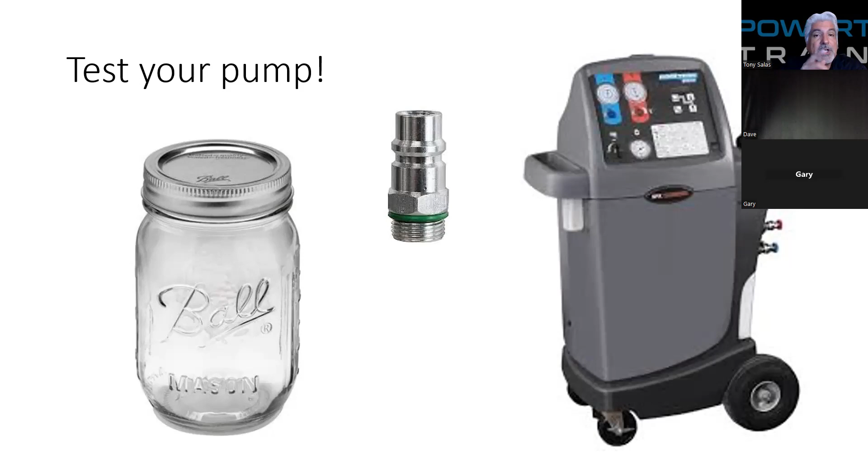And like I said already, you're gonna have to take my word for it. It's up to you. But all I'm saying is in the past, when I visited shops with my jar - I gotta go find mine - in this case, it doesn't boil the water at all, which means we're not pulling any moisture. And those of you guys in very high humidity environments, that's something you got to understand. So here you can see another example - the boiling point of water changes according to pressure.

So if you're at a high altitude, like the middle picture right there, you're going to see that the pressure is 4.9 at this altitude, so the boiling point will change because you're at a higher altitude, less than 4.9 psi. That's very high altitude, actually. So in this case you could see that the boiling point does change. I guess pressure on the water will actually vary its boiling point.

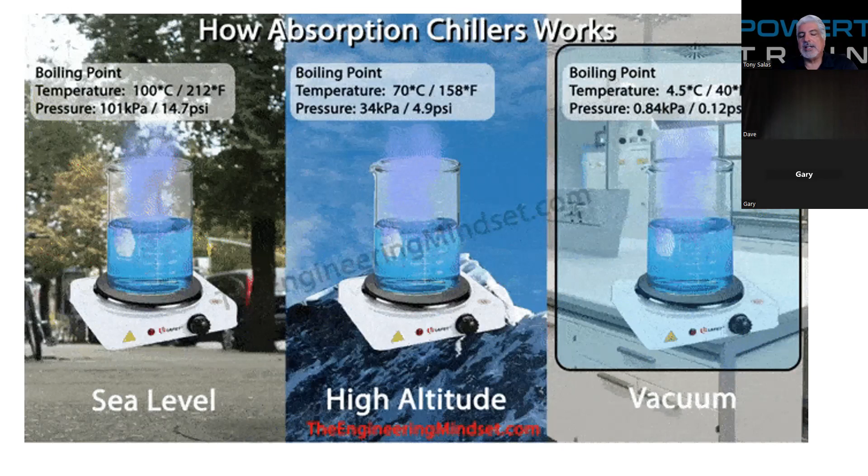At atmospheric pressure, we know that water boils at 212 degrees, right? But the temperature and pressure change, and that changes the boiling point of water. So if you understand what's going on with pressures, you know that you can boil water easily when you take it down into a vacuum. So that's what you're going to find out there. Word to the wise. Hopefully you got that visual off the video. Sorry, I had issues with it, but the jar will work with you.

So in conclusion with vacuum, you are using the vacuum to boil the moisture out. Not all vacuum pumps are boiling the moisture out, so you may need to change the oil of the vacuum pump. Definitely do some serious maintenance on that. Now, my old Robinair machine tells me every so many services that I need to change the oil in the vacuum. Actually, I'm due for one right now. So it's a good machine to tell me when the maintenance is due for it. Yours might have the same thing too.

And remember, air is dropped to a low pressure. We're pulling out that high pressure, creating a low pressure under atmospheric. So you're sucking in the refrigerant as well. And ambient temperatures, such as cold weather, can affect the charge rate when you charge that AC system, because cold weather also does not help in charging since the pressures might be too low, which we'll get into later on.

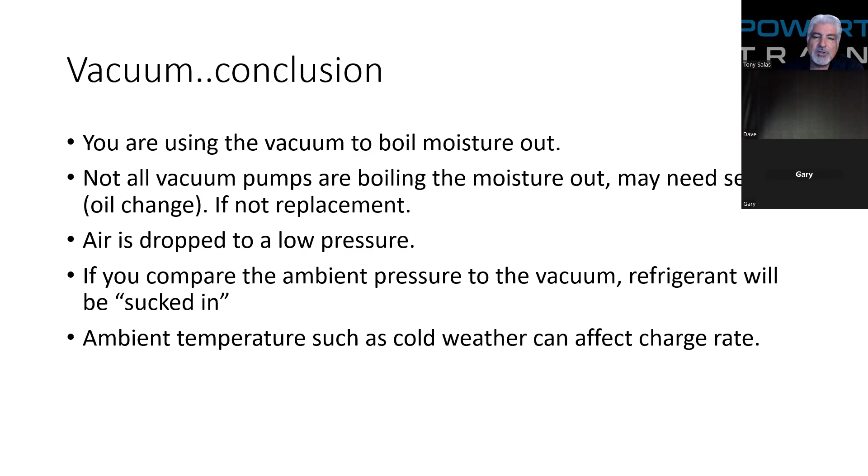Hopefully you can understand that when you take your system into a vacuum, you need to make sure that it is boiling the water. I am sure that I'm getting 28, 29 inches, maybe 30, but you're making sure that you're getting that vacuum, and it is indeed. So what I'm trying to say, if you didn't understand what I just spent the last 10, 15 minutes talking about, is it possible that you can have a gauge going down to 28, 29 inches, yet it doesn't boil the water? Yep. So you need to do your own test to make sure it does work.

So in the old days, and I'm sure they still sell those machines, there were some vacuum testing machines that you could connect your vacuum pump to, and it checks to see if it actually is pulling enough vacuum to boil the water out. But again, the jar method works very well. So you're welcome to do that too.

So in conclusion with the AC service, once vacuum is performed, check for a drop in vacuum. Make sure you're doing that, verifying possible leaks. Let's say you did 15 minutes of vacuum, and at that point you're going to check to see if the gauge moves. If immediately it starts going back up, yeah, you do have a leak. You're not holding vacuum at all. It should hold steady to make sure there's no leaks at all.

So remember, charge is weighed. At that point, you need to know the specified charge amount. So here's two different trucks. The top one is a Power Stroke 6.4. The bottom one is a Duramax. And you can see that the Duramax on an L5P, an early L5P, has a refrigerant capacity of 21 ounces, while the Power Stroke is 27 ounces, so you should know the spec.

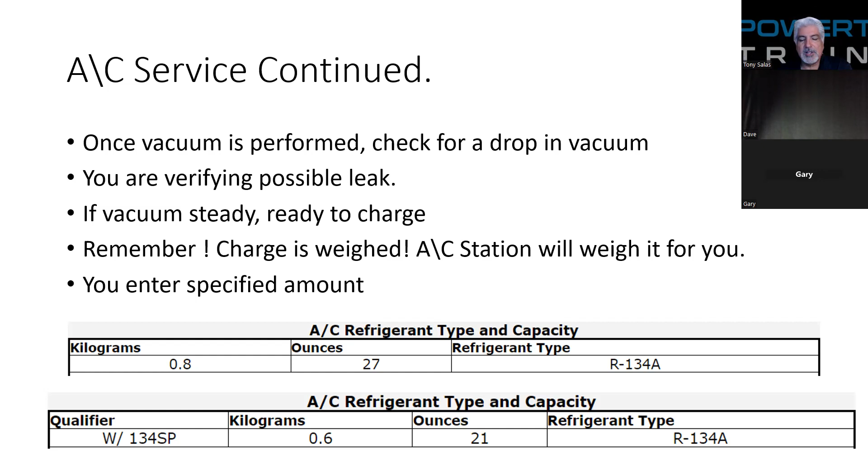So in this case, you can do the translation. If you have a phone or some type of smartphone, you can have it do the conversion from grams to pounds. So it definitely works very well. It's essential that you charge it to the correct weight and let the machine weigh it in for you to do it properly.

Like I said already, when you start the AC service, don't judge the AC system by how it is. It's a good idea to evacuate it and recharge it properly just to make sure it has the correct charge in it. That's why we charge for that AC service.

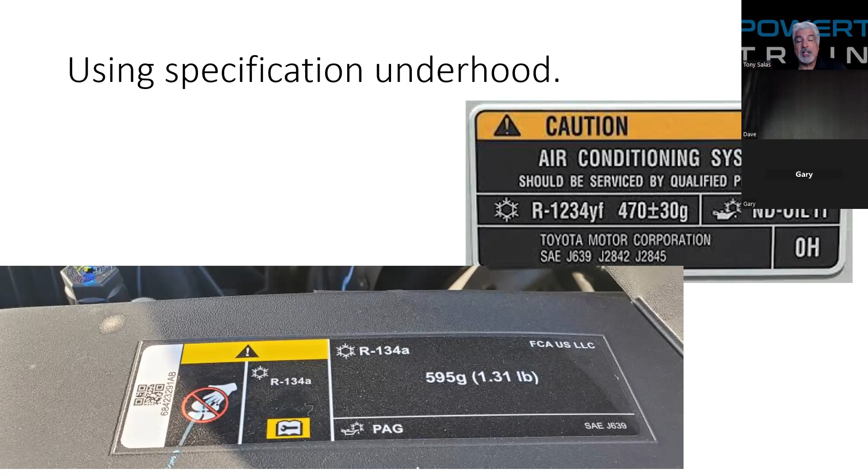You got to watch out there's no excessive dye, no excessive oil, and at the same time make sure it doesn't have a whole lot of air in the system. I've done AC services on vehicles that came in for not enough cool air, it was lukewarm, and I just recovered and recharged, made sure everything was okay, and now the AC system works great. Believe it or not, that has been happening. You can come across the same thing too, because the person might have over-oiled or overcharged the system.

As we move along here, we've got less than 10 minutes left. Please note, humidity does play a role. I did mention that the AC system cleans, cools, and dries air.

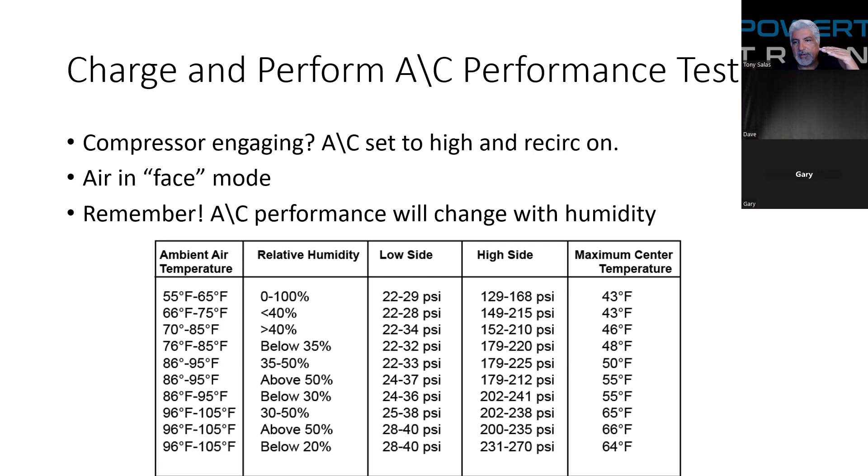So it is normal to see warmer temperatures when it's very humid, because again, the system is working harder to dry that air. It's trying to extract all that moisture out of the air as it's going across the evaporator, so it's going to freeze it up a little bit. That's what we see going on. Once again, the more humid it is, the higher the temperatures you're going to see. But again, the customer will still feel cool because it shoots that air across the face that makes them feel dry.

Now there are pressure-temperature charts out there. In this case, you can understand and use that. This is even a quick test you can do to test the contamination of a tank. For example, I understand that at 65 degrees ambient temperature, the low side pressures ideally should be 25 to 35. Let's take it more realistic, let's say 100 degrees.

So at 100 degrees, low side pressures could be 50 to 55. Now, I can disagree with this, and let me tell you why. Because A, humidity is a factor, and B, if I got excellent airflow going across that condenser, I'm going to get colder, so these pressures will be lower. I'm not surprised that I will see 35 to 45 psi. It can get colder, so these would be, to me, high numbers for that given temperature.

But you cannot straight judge this because these are ranges only, due to humidity and the amount of airflow across the evaporator varying this. Let's say the truck is idling, I'm watching 45, 50 psi on the low side. All of a sudden the fans start to roar, more airflow, more cooling, the pressures are going to drop. In this case, it might drop while idling to, let's say, under 45 psi. That's what I could see there.

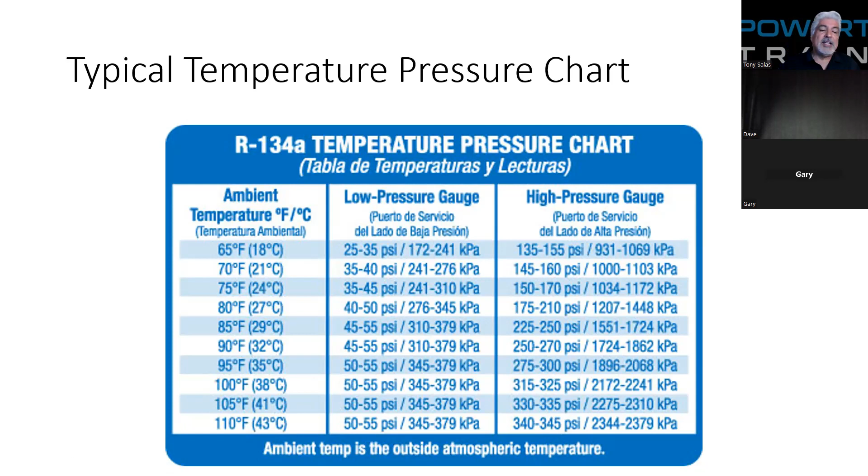That's why, off the record I should say, I'm hearing of a lot of people that don't want to deal with the 1234YF. They're converting them back to 134A. I know people doing that, and you're not supposed to, you're supposed to keep the gas, but you can get away with it because the pressures are the same. The question is whether the compressor and the dryer probably need to be changed. I'm not sure, I don't know, I haven't tried it yet. But I know people taking 1234YF back to 134A. So be aware of that.

So that's what we're talking about there. Some intros there when it comes to the AC systems. I guess I wanted to clear up that the 1234YF and the 134A pressure temperature relationships are very identical to each other. So there you go.